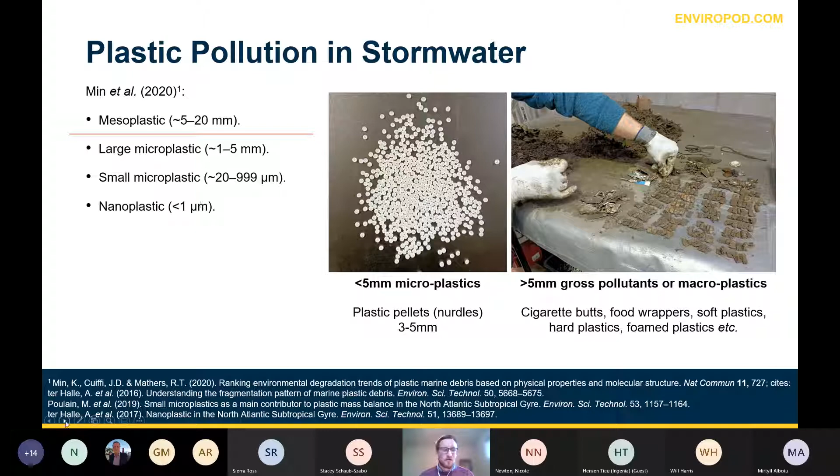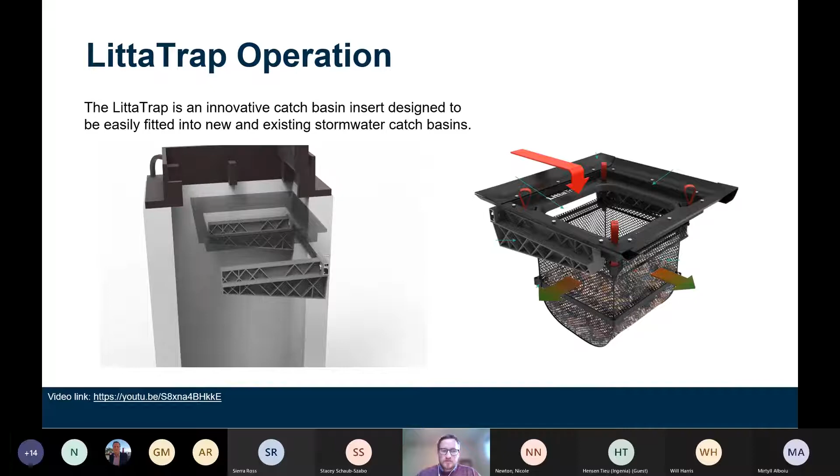The modular components allow it to be flexible within any catch basin design. We have a bracket frame that's installed with plastic seals, and a LittaTrap basket that is easily removed from the catch basin for maintenance purposes.

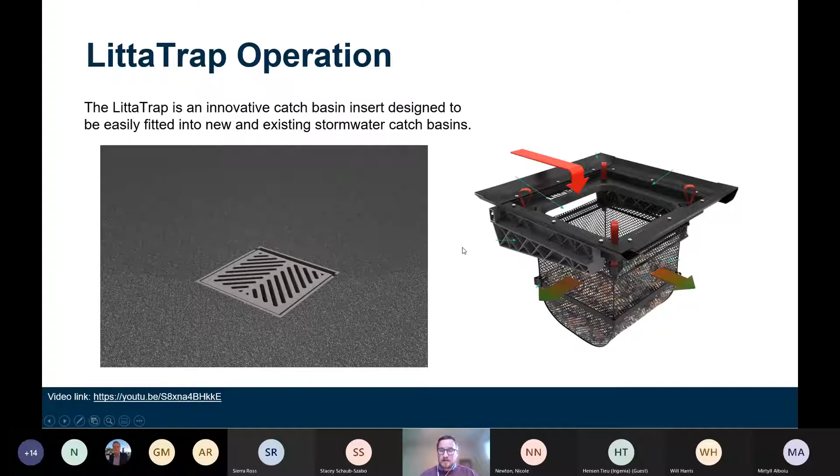It's an innovative technology that's very easily installed by any plumber or contractor.

Some of the benefits of the product are that, first and foremost, it stops plastic from leaving your site. It can also help reduce costs because it reduces the risk of stormwater blockages from gross pollutants. It captures these pollutants and keeps them dry.

It has a minimal maintenance cost. You can maintain a unit within a few seconds by hand and dispose of that rubbish where it belongs, in the rubbish bin or even recycling.

As I said earlier, it's easy to retrofit, and there's also a large amount of energy dissipation of the water going into the catch basin. This means it often increases the capture of other pollutants such as sediment, some particulate metals, and nutrients.

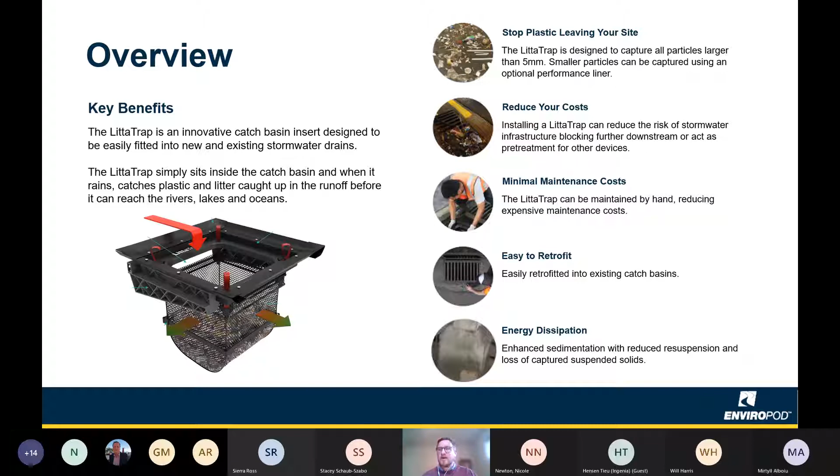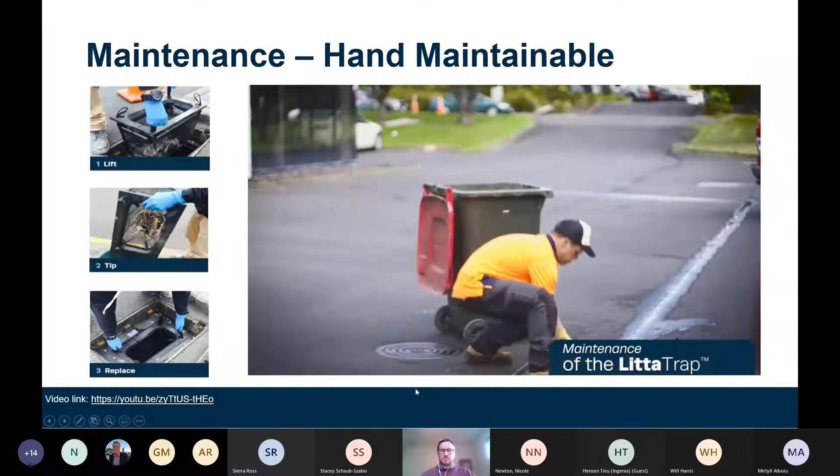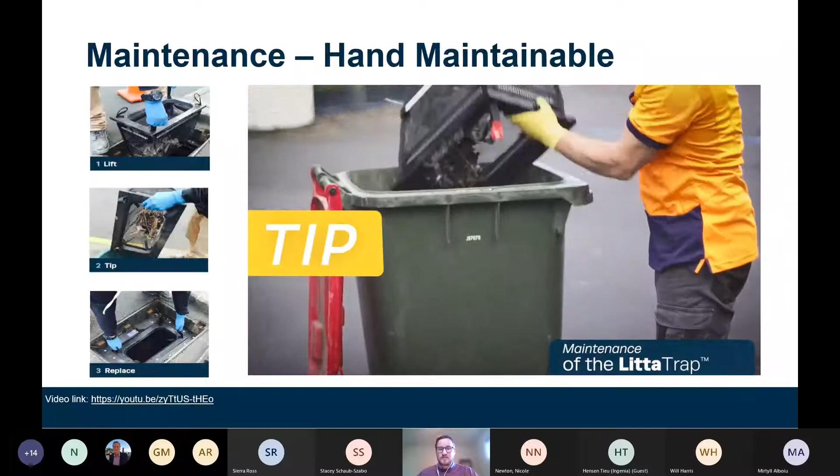Just a quick short video on maintenance. Maintenance can be done by hand, as I mentioned - this is just a pure lift, tip, and replace the basket. You can see all the contaminants that were captured have been put back into the rubbish bin where they belong, and then the LittaTrap goes back on.

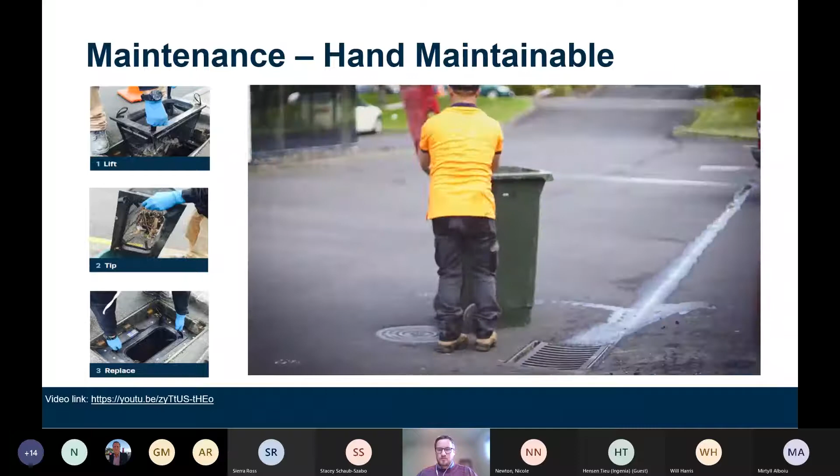Maintenance cycles are usually 2 to 3 times per year, depending on the loading. It can be up to 4 times a year, basically once every quarter. It really depends on the loading present at your site.

Just want to show you a few examples of case studies we've done. Obviously, a huge component of plastic pollution and the solutions to come are mainly through education. Education is a very effective measure, but it is not the only measure, and it cannot achieve 100% compliance or pollution reduction. So we are very engaged with school programs as well as academic programs at universities. It is a critical component.

We've also installed across a range of facilities, and some attendees of this webinar are not just from plastics manufacturing - some are involved in logistics, and if you have a logistics component within your business, this is often a point source for litter pollution. Retail shops are more on the public-facing side, where large amounts of plastic pollution are generated, but also behind retail facilities there are often loading and unloading zones, and this is certainly what's called a hotspot in litter pollution.

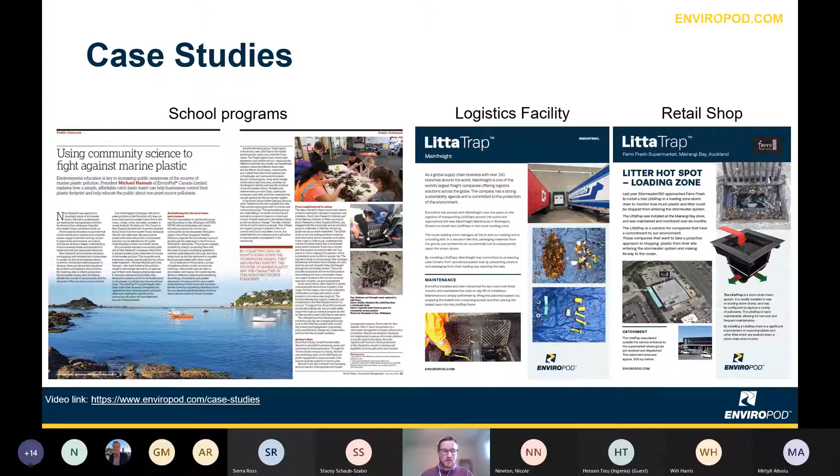Just a few more examples of case studies: manufacturing facilities, and specifically plastics manufacturing facilities, is the origin of a lot of this discussion. We've also worked with some good brands - Toyota has a very good global program to reduce the amount of plastic pollution that comes off of their sites.

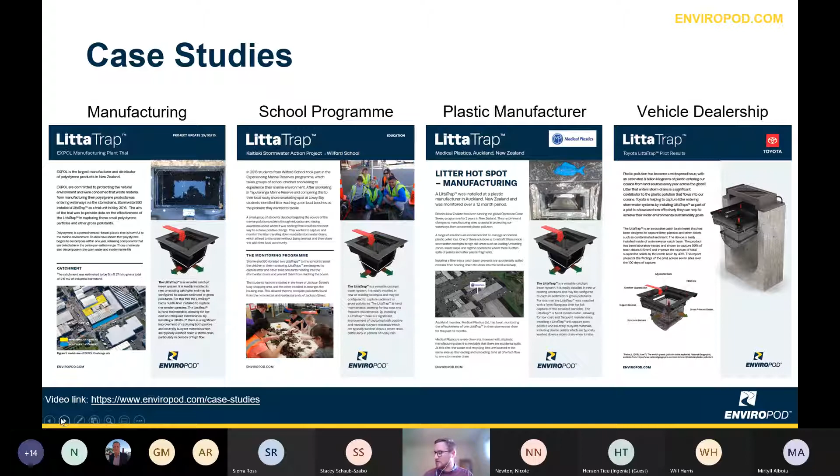Just to quickly give you an overview, a lot of you may have existing treatment facilities - some stormwater treatment facilities underground, or maybe rain gardens. So there's this concept within stormwater management of pre-treatment. Pre-treatment can be a very effective means of reducing maintenance cost of downstream treatment.

As I mentioned, manufacturing facilities and retail facilities - industrial stormwater is always a challenge, and capturing gross pollutants and microplastics is always going to be something that can be done very early in the treatment process, right at the top of the pipe, as close to the source as possible. This is effective at reducing the breakdown of plastics as they get transported through the stormwater reticulation network.

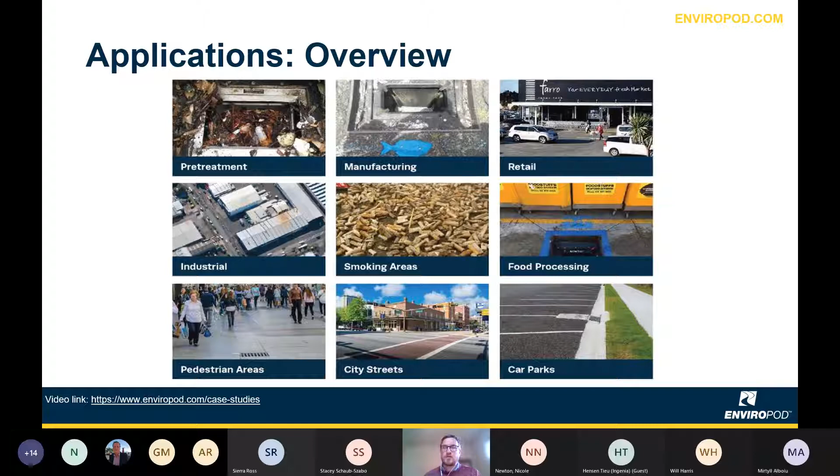And then at the bottom, you've got a lot of public areas with a lot of foot traffic, and these are always going to generate lots of plastic pollution loads.

Okay, to quickly focus on commercial and industrial areas. Our research and a lot of global best practice really focuses on both the transportation and manufacturing process of plastics. There's a lot of transportation of plastic resin pellets before they actually get to the facility, and it's usually these material handling processes where plastic resin pellets have the opportunity to escape and enter into the environment.

First of all, if you look at any transportation activities, you've got loading zones in and out of trucks, or even in and out of trains. There's a lot of resin pellets that are transported by train networks, and they're usually moved from one vessel to another through vacuum pumps.

A lot of our facilities have rubbish bins or rubbish collection areas, and these are also particular hotspots. We've all seen a rubbish bin that's been blown over by the wind and all of its content strewn on the ground. This is often just an accident. And if you have a protecting piece of equipment in the drain nearby, such as the LittaTrap, then you can rest assured that all that plastic pollution does not enter the environment.

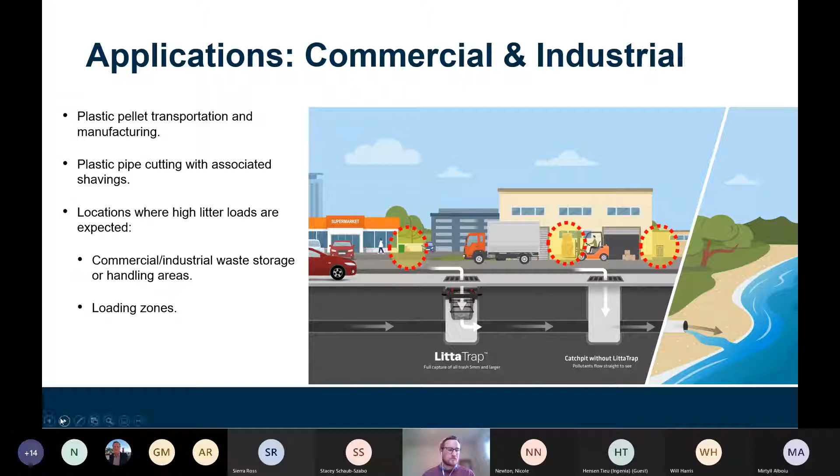I've got many hundreds of photographs like this on the right-hand side of plastic resin pellets filling up LittaTraps. I think the majority of people have seen or know what these resin pellets look like, sort of 2 to 5 millimeters in size. So they are smaller than 5 millimeters, so they don't fit within the world of gross pollutants.

So what we use in the LittaTrap is a 1 millimeter or a 1000 micron liner. We also have a feature within the LittaTrap where we have a bypass where water is able to flow through the unit in the event that the unit becomes full of pollution. What we end up doing with plastic pellets is we prefer to close that bypass, and what that means is that we can ensure the full capture of pellets.

So we increase the capture efficiency, because a lot of resin pellets are close to a density of 1. So with any kind of movement of water, they will actively float.

What this means for a facility is that you're removing one layer of safety when it comes to water flow. So what is required then is a more strict maintenance regime.

The benefits of doing it this way is that you provide a very high level of compliance and a high level of plastic capture. But it does mean you need to inspect and maintain these units on a bit of a more regular basis. A lot of companies have a 1-month inspection process, which is good. I would highly recommend any commercial facility have at least a 1-month inspection of all critical safety features such as pollution prevention, but also things like fire safety and so on.

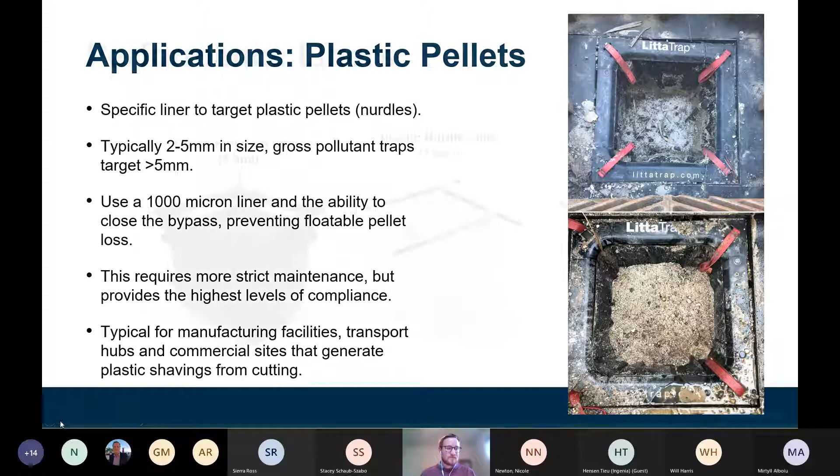Okay, I mentioned there are these performance liners. So across North America, we offer 3 types. 5mm is what's termed a gross pollutant liner.

Sorry, I think my signal just dropped off there. Can everyone still hear me? Yep, okay, we can hear you.

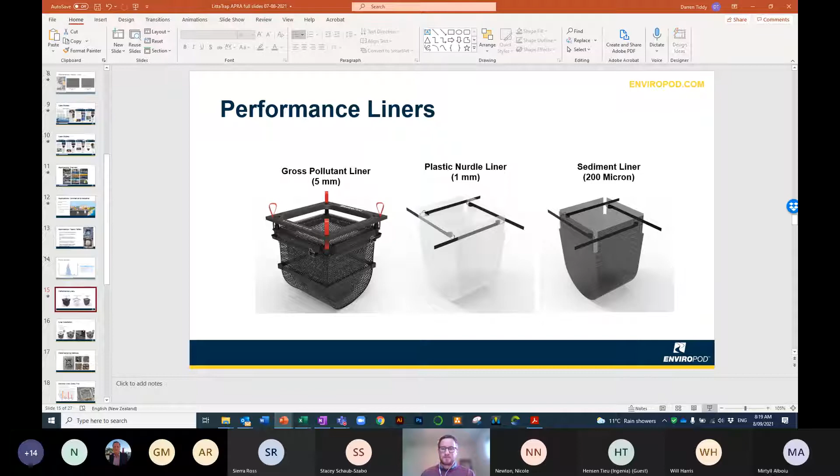So I was mentioning the state of California. They have a program where they're looking to install catch basin inserts to capture gross pollutants, everything over 5mm. This is a very effective policy. They started in 2015 and are looking to have basically zero plastic waste entering the stormwater network within 15 years, so it's quite an ambitious target.

We use the gross pollutant liner in public sites across Canada, as well as working with some big retail industries to try and get them to put these particularly in their loading zones. So if you're on a public site and concerned about coarse plastic materials, the standard LittaTrap with 5mm mesh liners will be more than sufficient.

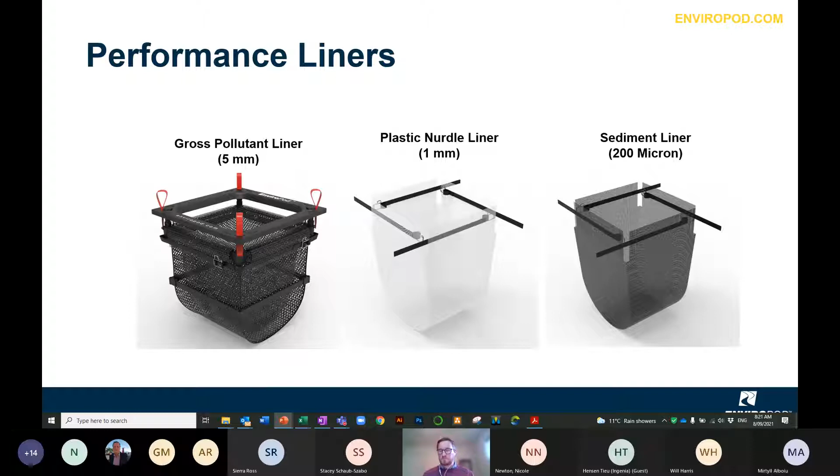If you've got plastic pellets or micro pollution on your site, then you're looking at the 1mm liner, or even finer, the 200 micron liner. So based on the type of pollution your site generates, you've got a range of 3 liners. They bring benefits in terms of capturing more or finer material, but the trade-off is the more you capture, the more you must maintain. This gives facilities the flexibility to utilize the technology to best suit their site and maintenance regime.

Just a quick word on the liner installation. This is an add-on feature or accessory, if you like. It's very easy to install the liner, and very easy to change them out. So if there is any long-term wear and tear, the liners are designed to last a long time. But if you have very high pollution loading, or very sharp pollution, these are relatively cheap accessories that you can swap out over time.

The LittaTrap design is quite novel, and there are components that can be added or removed. This makes the product highly durable, but in the case of having to replace parts, that's an easy and cheap process. We back the LittaTrap with an 8-year warranty on the static parts, that's basically everything besides the basket itself.

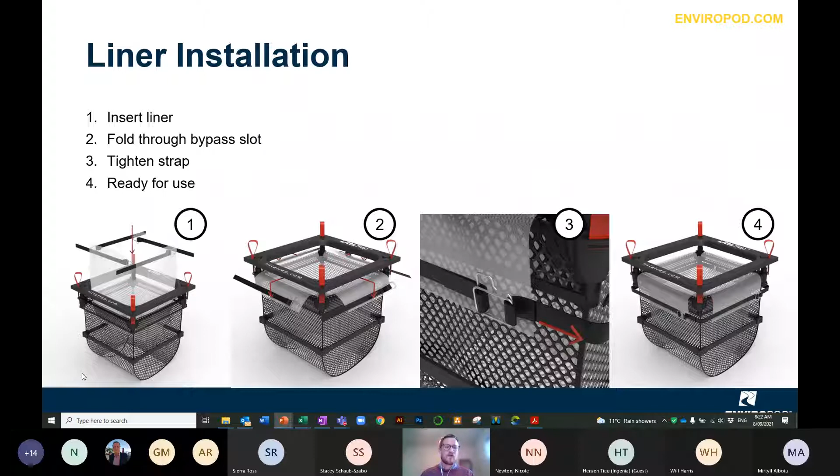So that's definitely been a target for us. We've worked with a lot of recyclers across the world to try and improve their environmental footprints overall, because the work they're doing already is saving plastics from going into landfills, but we also want to save plastic from going into the environment as well.

There's a lot of people looking to gather data on how much plastic pollution is coming off certain facilities, and if you introduce some of the, for example, Operation Clean Sweep best practices, how much are we reducing the load of plastic entering the environment?

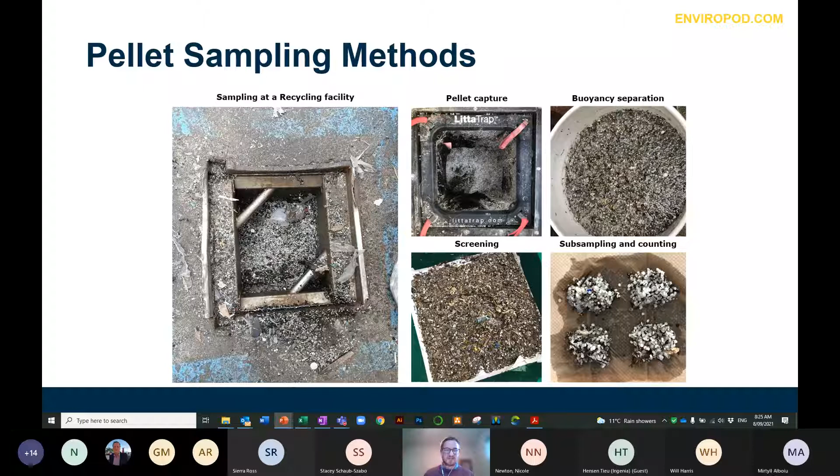I like this slide because these resin pellets on the right-hand side were supposed to be for production but were spilled or escaped from the process. They never even became their final product. On the left-hand side, we've had lots of different bits of plastic through this recycling facility that break up—the beginning of their life on the right side, the end of their life on the left. In both cases, neither is welcome in the environment—very much welcome in plastic products such as syringes for COVID vaccines, but certainly not down the drain.

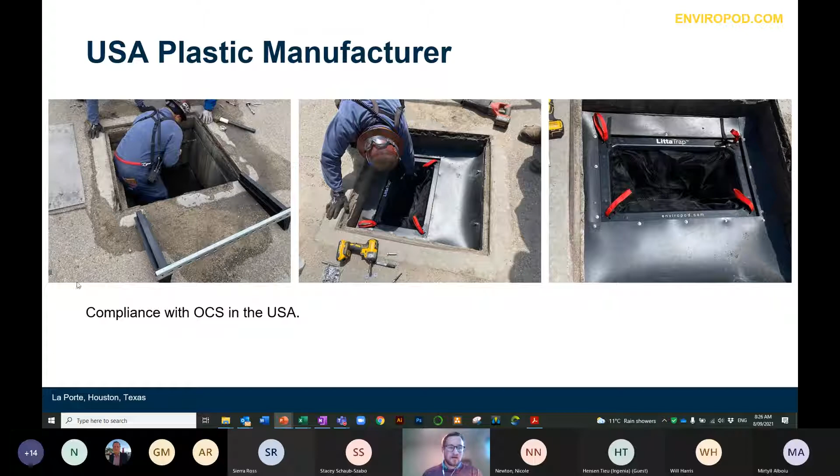I'm going to skip over Operation Clean Sweep because Neil will provide some detail there. I just wanted to give you an overview: it's a global initiative, and we are working with plastics manufacturers across the continent, down in Texas. You can see the size of their drains—there's a common joke in Texas that they have no rain, and then they have a hurricane. So you can see incredibly large catch basins with very large LittaTraps capturing a lot of plastic pollution. We definitely sympathize with people down in the Gulf area now as a hurricane does pass through there.

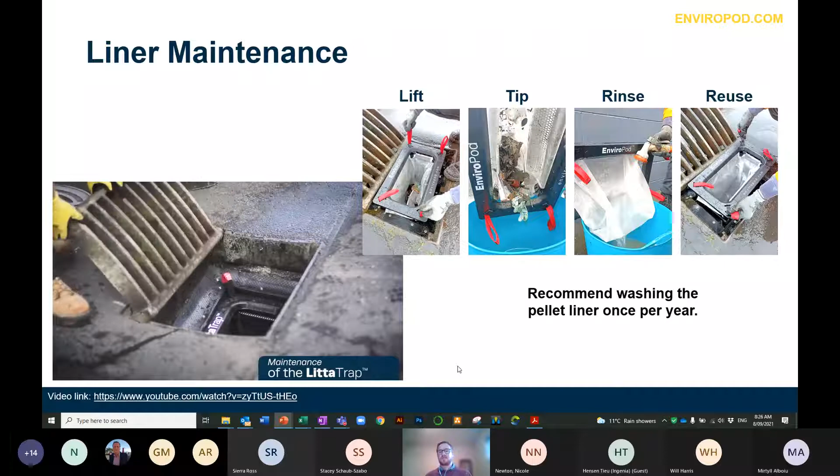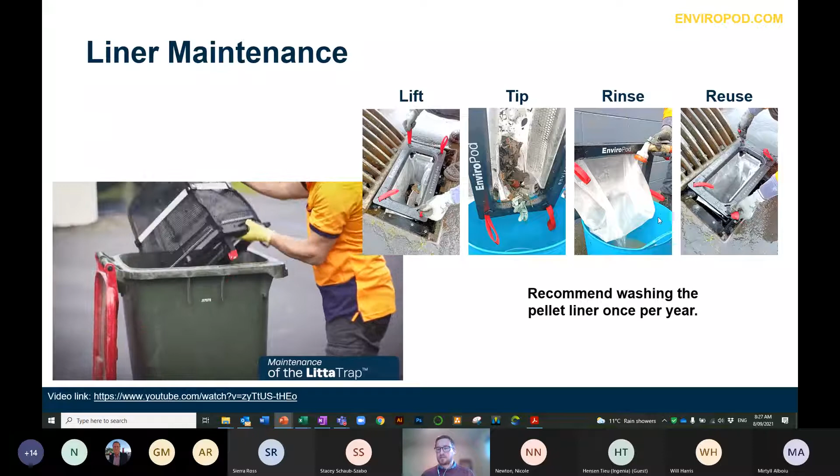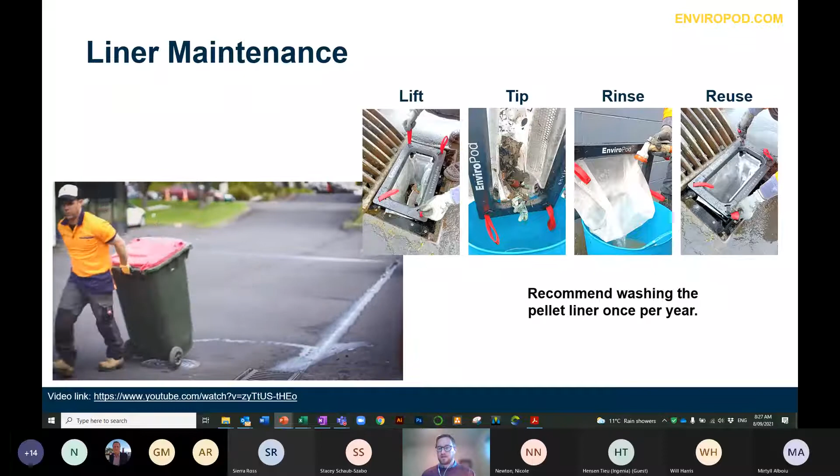Just a quick mention on liner maintenance: a LittaTrap without a liner is easy to maintain. If you do have a liner installed, it's the same procedure—we just encourage at least a rinse once a year of that 1 millimeter liner. It does not blind very easily with debris, but any kind of cleaning will help with the hydraulic flow, because as much as pollution capture is important, so is the flow of water—it needs to move out and off that drain and off of that site.

Okay, I've got a few notes from the City of Calgary. I will let Nicole talk to this at the end of this webinar. I just want to mention quickly, if any facilities are looking to install LittaTraps, we have a sales agent based in the USA, Will Harris. He's on this call, and we will provide his contact details for anybody looking to install LittaTraps on their facilities or with any further questions.

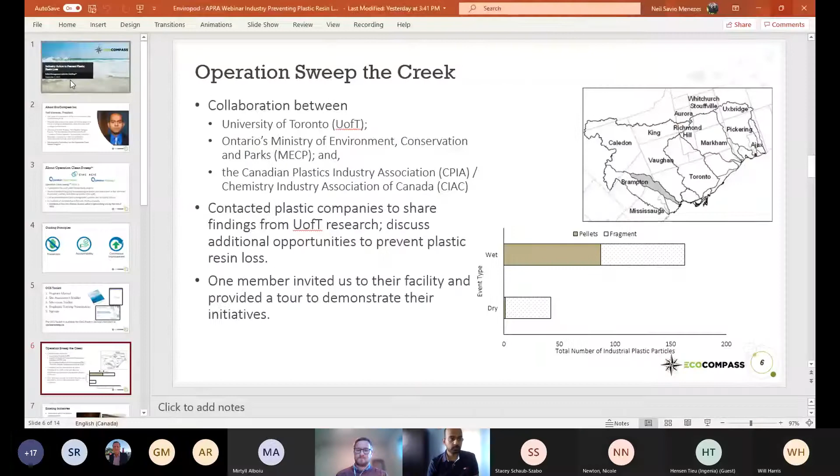As Darren mentioned, my name is Neil Menezes, I'm the president at EcoCompass Inc. I'll be talking today a little bit about Operation Clean Sweep, which has been referenced quite a few times in Darren's presentation, and then also one of the pilot projects we undertook late last year to test the effectiveness of the LittaTrap in preventing plastic resin from entering into the environment.

A little bit about me: I've been in this industry for about 10 years, supporting a broad range of companies in the environmental and sustainability fields. Part of the projects I work on typically focus on waste diversion programs, ranging from recycling to other materials. To determine the effectiveness of these programs, I do a lot of data analytics and identify strategic partnerships to bring together different stakeholders—especially now with environmental issues top of mind for companies, governments and the public—to help understand and work towards a solution together.

In terms of the organizations I work with, it's been a broad range of municipal clients, especially here in Ontario, but also a lot of work with brand owners and other associations, including the Canadian Plastics Industry Association and the Chemistry Industry Association of Canada. Right now, in my current capacity, I'm supporting as sustainability consultant on the Operation Clean Sweep program being run by CIAC.

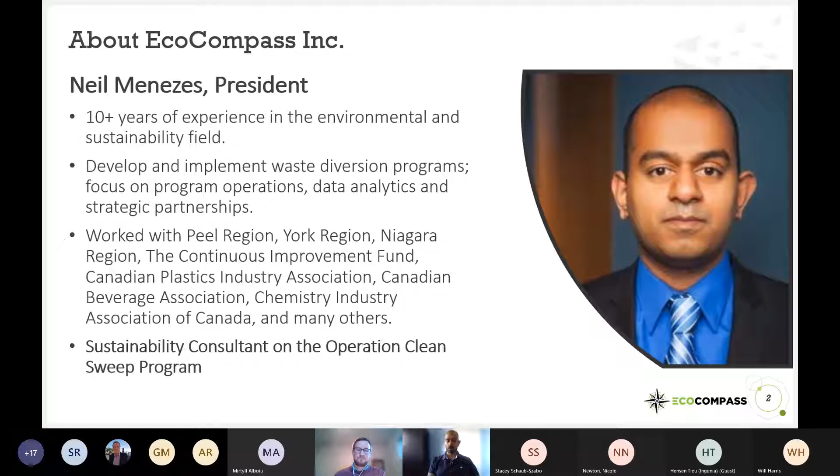What I'll do is provide a little overview of the Operation Clean Sweep program here, specifically in Canada, because it is an international program. Those of you in the US will be familiar with the program run by ACC, and if anyone's on the call from Europe, there's also Plastics Europe running the Operation Clean Sweep program. I'll focus primarily on how the program is run here in Canada, but I'm happy to answer any questions related to that program and how it may apply to you.

So a little bit about Operation Clean Sweep program in Canada. It is similar to the program globally. It is a prevention-focused pellet stewardship program with the goal of achieving zero plastic resin loss into the environment, especially into waterways. The focus, because it's so preventative, is not designed to necessarily require significant investment, but it's a matter of improving and implementing good housekeeping practices and procedures at the site level. The whole idea is to make sure that plastic resin doesn't leave your facility, fully recognizing there are multiple pathways for the materials to escape a production facility.

One of the key things we wanted to do with this program is make sure it's sustainable. It's something we want companies to implement into their regular management systems and part of their company culture. Even though this program is presented as Operation Clean Sweep, and it has its own standing from that perspective, the idea is we want it integrated into everyday operations, because to achieve that zero plastic resin loss goal, it requires day-to-day implementation of these operations.

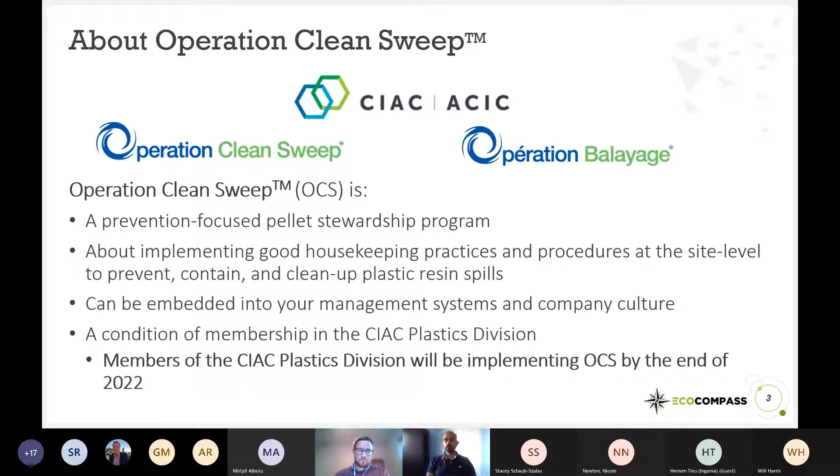And for anyone that's a CIAC Plastics Division member, there is a commitment to have all members implementing this program by the end of 2022. This goes to the fact that the program is evolving in terms of how it's being implemented here in Canada, and now it's becoming a requirement for members to actually implement it, because we want to demonstrate the industry's leadership in providing environmental stewardship and proper management of plastic resin to ensure it doesn't end up in the environment.

So the program has 3 simple guiding principles. As I mentioned earlier, the main first focus is prevention, and the ability to prevent plastic resin from entering the environment by implementing good housekeeping practices and updates to your procedures is going to be critical in that success.

The second guiding principle is accountability, and part of the accountability is to get more information and involvement from member companies to share their experiences in terms of how plastic resin is being managed at their sites and potential issues that may have arisen as operations evolve. We recognize plastics is a primary focus and is highly valuable for the economy in terms of providing goods to consumers. So what we're trying to do is collect a little bit more information on how members are managing the plastic resin, so we can support sharing best practices for preventing plastic resin entering the environment.

And the third most critical step is continuous improvement. This ties back to accountability in terms of getting more information from member companies on issues that arise from managing plastic resin, but we're also looking at best practices that companies have implemented that are successful. Part of that is conducting pilot projects, which I'll talk about later in my presentation, in terms of a pilot project we conducted here in Ontario with one of the member companies.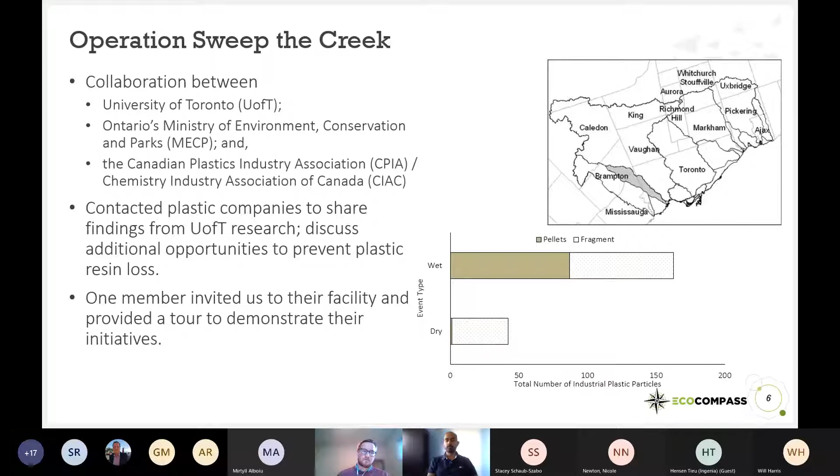There was one member company that was really engaged in this process and wanted to take it to the next step, so they invited us to their facility to help assess opportunities for them to avoid plastic resin from entering the environment.

The company had undertaken some initial initiatives by sealing - I won't go through all of them - but they went through some initial practices to prevent plastic resin from leaving their facility and entering into the environment. They did daily sweeps of their site area, both within and outside the area.

They placed appropriate catchment systems below their silo connection points and railcar connection points, and they also looked at implementing regular vacuuming of the outdoor areas with shop vacs, identifying different solutions for all of the different areas where plastic resin was being handled and potentially being lost into the environment.

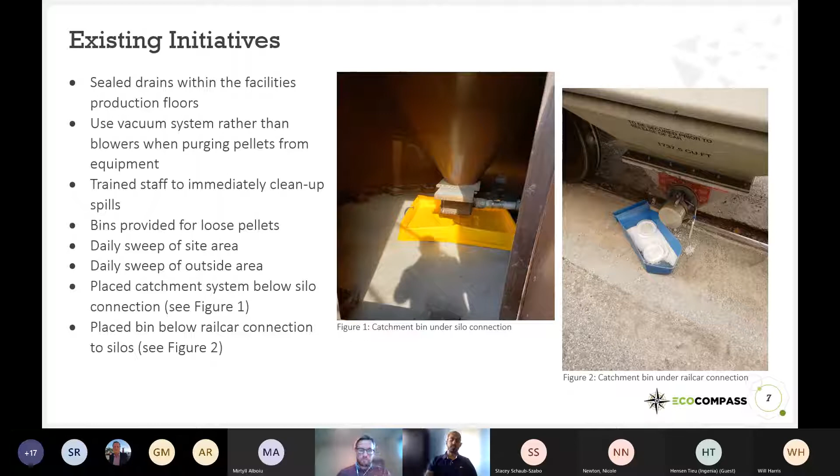This is just a list of some of the existing initiatives they had undertaken to prevent plastic resin from leaving their facility. However, with all of those initiatives being undertaken, there was still some plastic resin that was visible around their facility.

One of the key things we noticed during the site visit was they did not have any screens on their storm drains. Looking at the potential opportunity for a large rainfall or storm event where plastic resin could get dislodged from the rail track here and potentially flow into the storm drains, we saw an opportunity to work with EnviroPod to install the LittaTrap to test its capability of preventing plastic from entering into the storm drains.

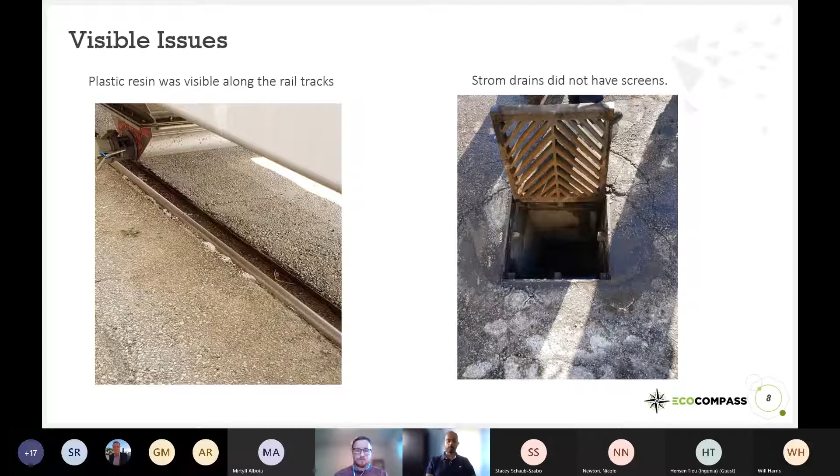In discussion with EnviroPod, recognizing they're a New Zealand-based company, we wanted to really test the effectiveness in the Canadian environment. Recognizing we have four distinct seasons, with the snowfall and also our fall season where a lot of leaves could potentially jam the system, we really wanted to stress test the LittaTraps to see how effective they would be in preventing plastic resin from entering the environment, but also how frequently they needed to be serviced to prevent potential flooding situations.

As Darren mentioned, we installed two initial LittaTraps for this pilot. We aligned them with the pellet liner, the one millimeter size screen, and the one thing we made sure was to remove the bypass openings for the LittaTraps. Obviously, we didn't want anything escaping the system, so we worked with EnviroPod to make sure those were sealed, to fully test the capabilities and stress test this LittaTrap to make sure it didn't cause any flooding issues, given the fact that the LittaTraps were installed in December 2019, and we knew with the snow that would come, it would be a good test to see how it can manage the melt that will occur once we enter into the spring season.

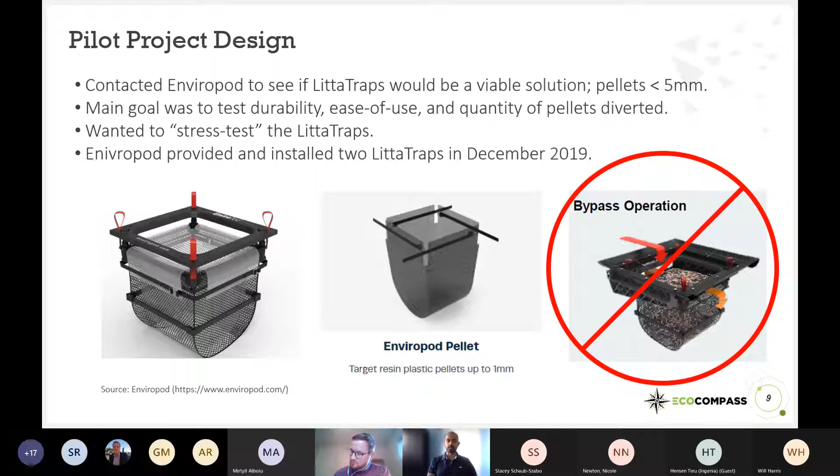So in terms of the installation of the LittaTraps, after we installed the first 2, the company had contacted EnviroPod, given its initial success, and clearly there was no indication of flooding that had occurred. They installed additional litter traps in the remaining storm drains.

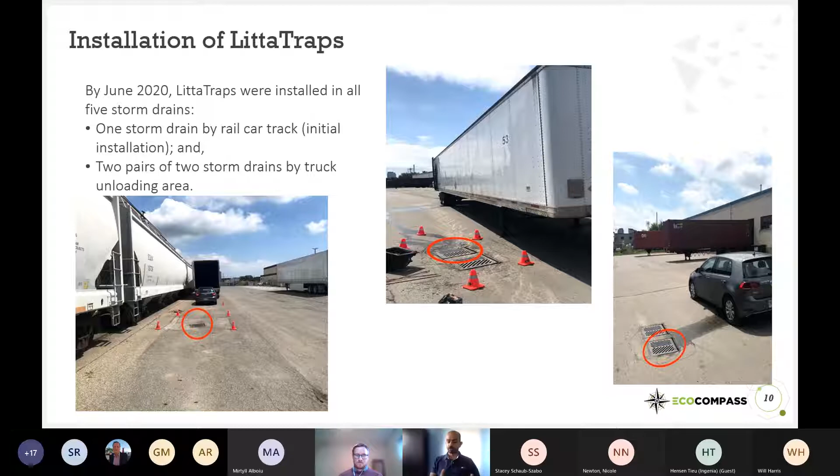So not only did we install the litter traps, we wanted to measure the effectiveness and measure the amount of plastic resin that was being trapped or prevented from entering into the environment by using these litter traps.

Working with EnviroPod, again this was in the midst of the pandemic, we were still able to service them on 3 different occasions, and you can see there were some gaps between collections, primarily driven by the lockdowns Ontario was going through. The first collection was about a 35-day span. The second one ranged 82 days from that first collection point, and the third collection point ranged about 34 days. So you can see there's a bit of variance in terms of how frequently these litter traps were serviced.

What was clear was that, because of the effectiveness of what the company had implemented in preventing plastic resin loss from the initial point, we don't have any of those pictures that Darren showed with a high degree of plastic resin being diverted into the litter traps. But you can clearly see there are some visible litter fragments embedded in all of the other dirt and debris trapped in the litter traps.

So for each litter trap, we identified the depth in terms of the loading that had occurred, and the type of contaminants visibly present, here we see...

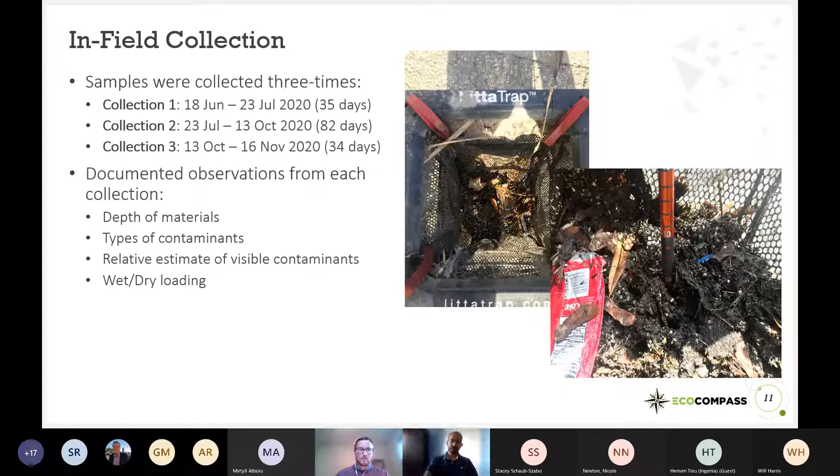Sorry, Neil, I think your microphone just muted. That was strange. Oh, thanks. Sorry, can you hear me now? Yes, got you. Okay, perfect.

So working with UofT, we wanted to quantify the amount of plastic resin loss that was being prevented using the litter trap. Darren had talked about the sampling methodology, which was developed in partnership and relied heavily on the Seabin project by the Rochman Lab from UofT. We quantified the amount of pellets, foam, and hard fragments found within the 5 different litter traps installed at the site.

Here's a picture that identifies the starting point of all the materials, including the debris and the plastic resin all together. Here we had the ability to zoom in and identify them separately: here's a pellet, a random plastic fragment, and some foam found in this sample.

We then zoomed in further to quantify the amount of individual plastic fragments, pellets, and foams found in the litter traps. Again, we relied on a sampling methodology, recognizing that counting each one of these pellets would take forever and probably isn't the most effective use of everyone's time. So it's a way of finding that balance between quantifying how much plastic resin is being diverted and developing a sampling methodology to make this a more practical approach.

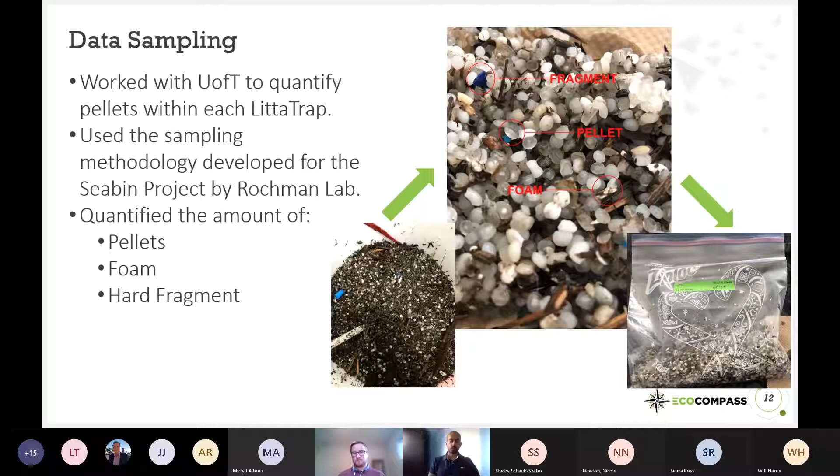Out of the 5 litter traps installed, we clearly see certain LittaTraps had a greater degree of plastic resin found within them. In total, based on our estimate, we counted about 60,000 pieces of plastic resin that would have potentially entered the environment if this facility did not install the 5 LittaTraps.

Now, recognizing 60,000 pieces sounds like a lot of plastic resin entering the environment, but these facilities handle rail cars full, and your facility may even handle significantly larger volumes of plastic resin. The total amount by weight was estimated to be about 1.2 kilograms.

So in terms of overall weight being managed versus what was leaving the facility, we recognize it's a small amount, but this is where preventative measures are critical in reducing what could be lost. The LittaTrap becomes an effective tool to make sure it becomes that final parachute, that backstop to ensure that it's impossible to capture everything in your day-to-day operations. The LittaTrap was proven effective in preventing whatever small amounts were still being lost after all of the preventative measures.

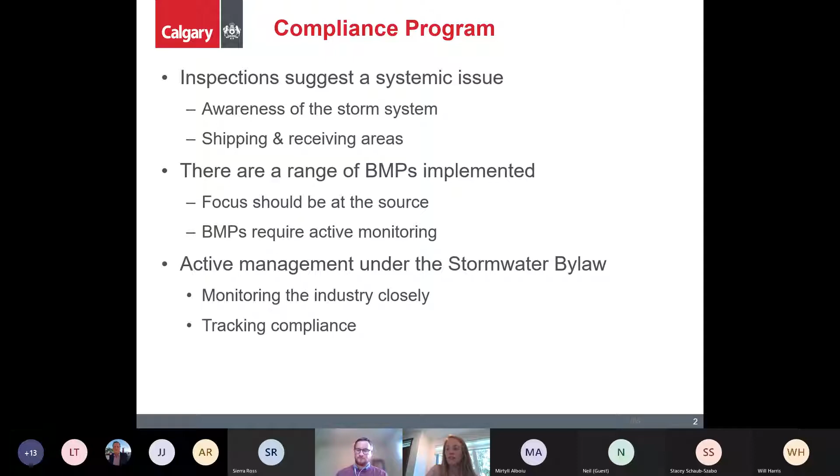My team continues to actively manage this under the stormwater bylaw, monitoring the industry closely and tracking compliance, working with businesses on both ends of the spectrum, trying to take lessons learned from the businesses that have been successful and work with some of the more challenging ones.

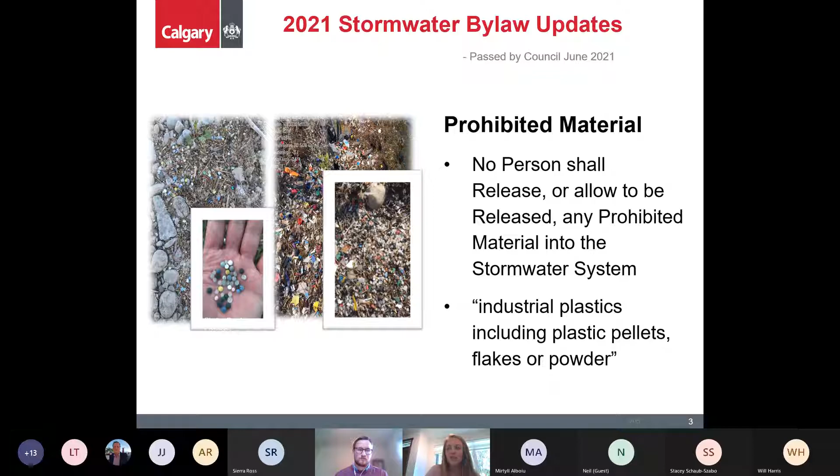So just to share an update, in 2021 Council had actually passed some revisions to our stormwater bylaw. Under there, it states that no person shall release or allow to be released any prohibited material into the stormwater system. Earlier on, what a prohibited material was, was a bit broader, but Council has decided to specifically mention industrial plastics, including plastic pellets, flakes, or powder. With that being a prohibited substance, I would say technically the tolerance is zero entering the system.

My team has started to work on some more education materials to address any kind of business—not specifically the plastic industry, but industrial, commercial, and institutional businesses as a whole—creating awareness around some of those practices, with a focus on minimizing exposure, encouraging clean and tidy sites, finding ways to manage runoff. In other situations there are challenges with erosion and sediment control, which, if you have large soil loss in unpaved areas as Neil had talked about, can also be a way of mobilizing some of the pellets.

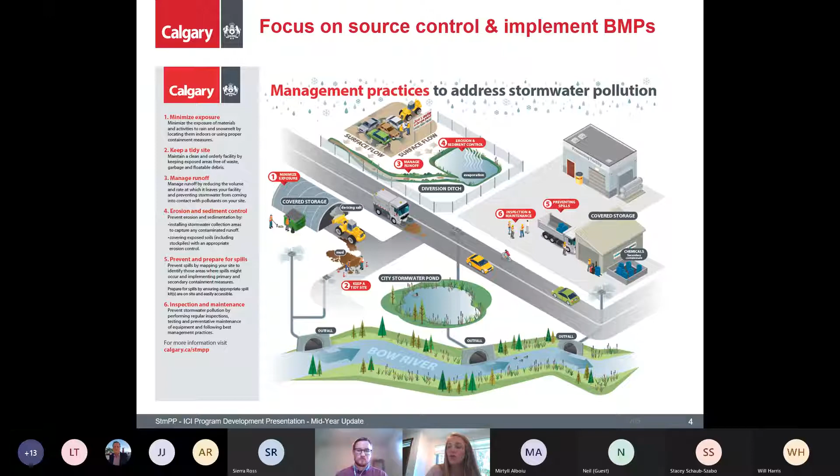Focus on prevention and preparation for spills. If you do have a spill, accidents do happen—what is your procedure and response for that? And having ongoing inspection and maintenance programs. These are just some of the things that we're starting to promote through our ICI, Industrial, Commercial, and Institutional program.

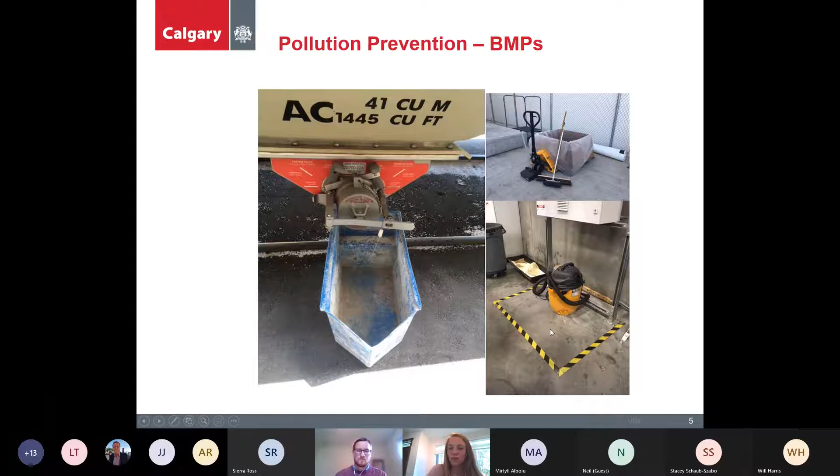Just wanted to share a few quick photos similar to what Neil had shared—these are some of the BMPs we see in place. So there are bins in the rail yards collecting these during loading and offloading, and just making some of the tools for quick cleanup visible and accessible to employees really helps.

Diving a little more into inlet protection, there are various types of inlet protection, and the LittaTrap is certainly one that is garnering a bit more attention and has helped prompt a more formal process in how to install it or gain approval for it.

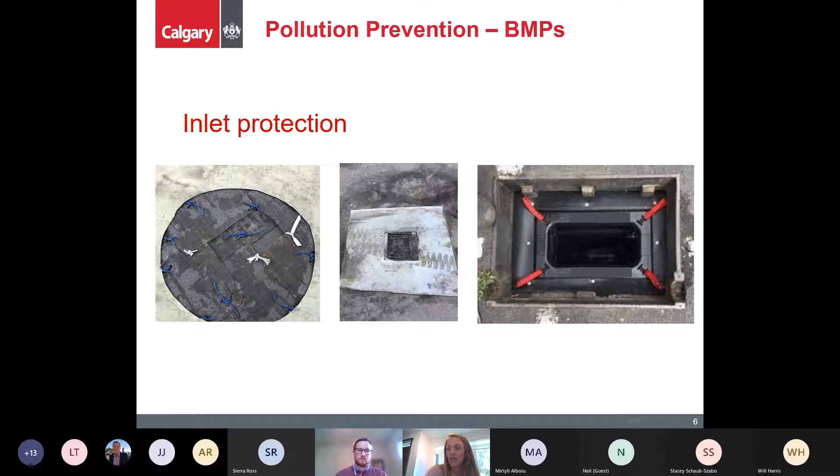So just over the summer, my team has put together a guideline document for obtaining approval at ICI facilities, and I'm just going to talk through that.

Just to recap the stormwater bylaw: no one is actually permitted, under the bylaw, to install an inlet protection device within any part of the stormwater system, whether public or private, without prior approval of the city. One of the main reasons for that is it gives us an opportunity to evaluate if the installation, depending on the type of device, might cause hydraulic issues that could cause neighbor-to-neighbor flooding or flooding into public spaces, which raises a safety and liability concern for the city.

In most cases, such devices are not permitted to be installed within any storm manhole or catch basin in the city right of way. So on the public side of the infrastructure, it's not a best practice that we like to promote, given the operation and maintenance requirements, and some of the public safety risks that might arise. But there are situations where it's required.

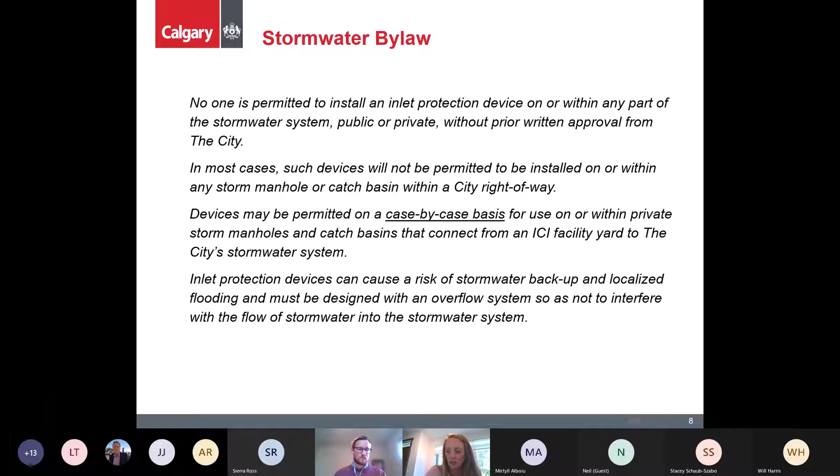However, devices may be permitted on a case-by-case basis for use within the private system at an ICI facility. As I mentioned before, these inlet protection devices can cause risk of stormwater backup and localized flooding, and typically must be designed with an overflow system that cannot interfere with the stormwater. In the pilot case that took place, the overflow system was demobilized, but it was for a specific reason, and that would be taken under consideration depending on the objective for installing it.

So just to give a quick overview of the procedure for requesting approval, this is specific to Calgary. We've set up a process for people to submit a request to the Stormwater Pollution Prevention email address, stmpp@calgary.ca, with a specific subject line to request to install an inlet protection device. There's a one-pager that will be posted on our City of Calgary website, calgary.ca/stmpp. I was hoping it would be up for this presentation, but it hasn't made its way there yet, so you'll have this information after regardless.

So what happens once that request comes in is my team will review it, and we would generate a 311 service request. You should get a response from the team within 3 to 5 days, as Darren had mentioned earlier. Then the application process will start, and it would take potentially up to 14 business days, and the applicant would be notified of the outcome.

We might be asking for some additional information, or we may request for an inspector to come on site to do a quick inspection for some pre-approvals. Depending on some of the information we have, there might be a rejection of the application. But at the end, you would receive an approval letter before installing that device.

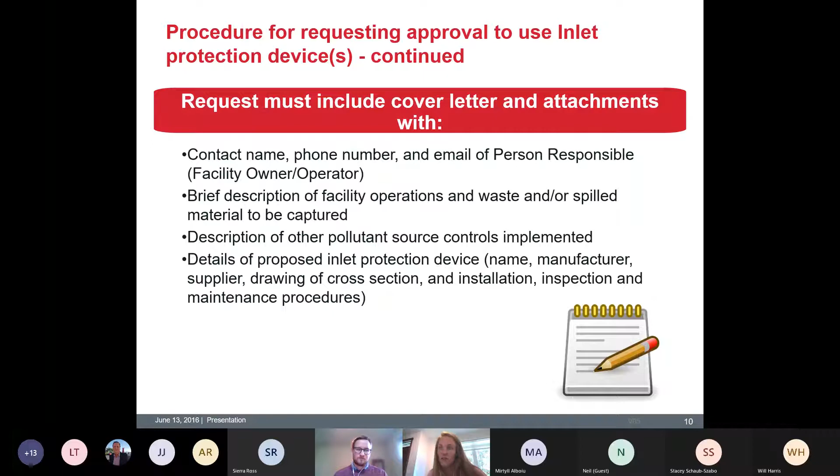I just wanted to reiterate, as Neil had already said - and I'm glad we're speaking the same language - that the inlet protection is your last line of defense. And if you start to see plastic pellets in these, I know the expectation of zero is very challenging, but it does start to...

...give some indications that maybe some of your upstream BMPs may need to be revisited. So just a heads up to keep an eye on that. There might be other things in terms of sediment buildup that's plugging the system, or some breakdown taking place if you're using other inlet devices, or in the case of the LittaTrap, maybe some other maintenance or increased maintenance that needs to take place. But at the end of the day, we're all trying to work together for that goal of zero.

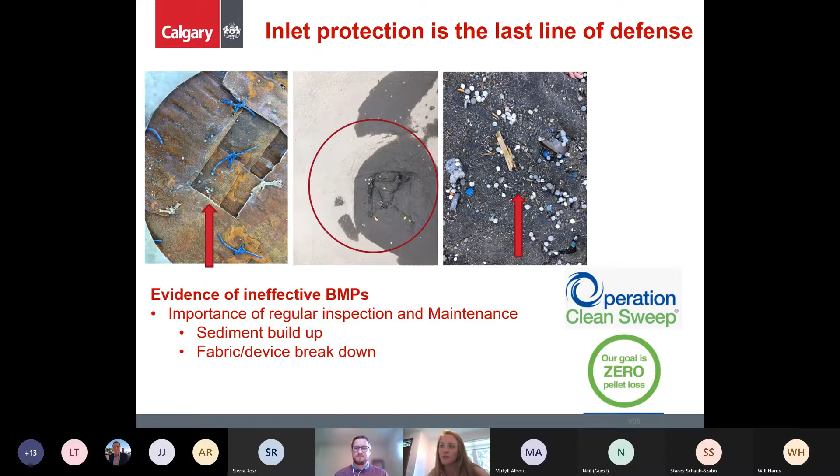And with that, I will leave it open to any questions.